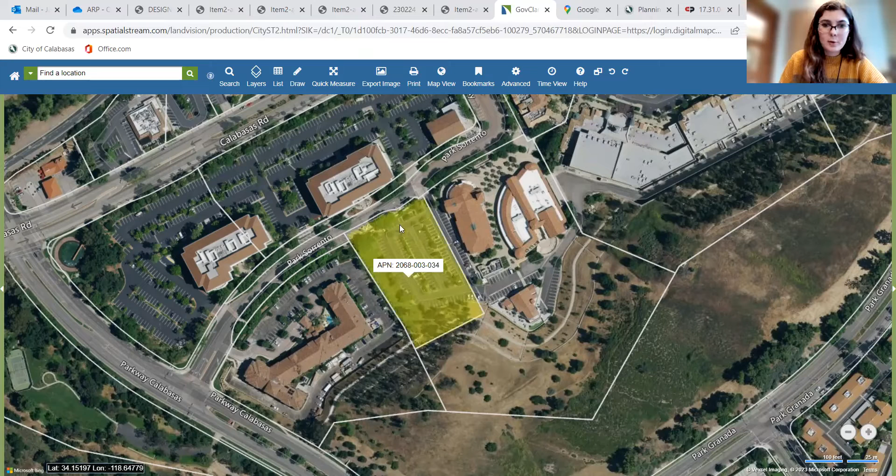So I'll just talk a little bit about the project location first, and then I'm going to flow through the plans really quick, and then I'll turn it over to the applicant's architect to talk a little bit about their design, if that's okay. So this is the proposed project location.

As you can see, this is located off of Park Sorrento. As we've heard already, it's directly next to the Civic Center complex, across the street from the office buildings located on Park Sorrento, and surrounded by the Hilton Garden Inn on the other side. As mentioned, it is in the commercial mixed use zoning district and the affordable housing overlay zone.

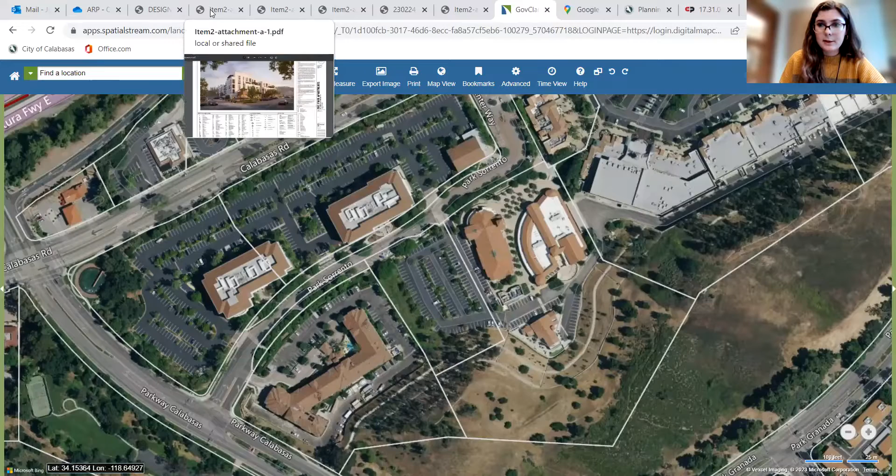Then I'm just going to pull up the plans. Again, I'll keep it brief. This is a rendering of the project. You can see the applicant is proposing to have ground floor commercial, along with parking on the ground floor, and then one level of underground parking below that. Then we have 4 levels of residential units located above that.

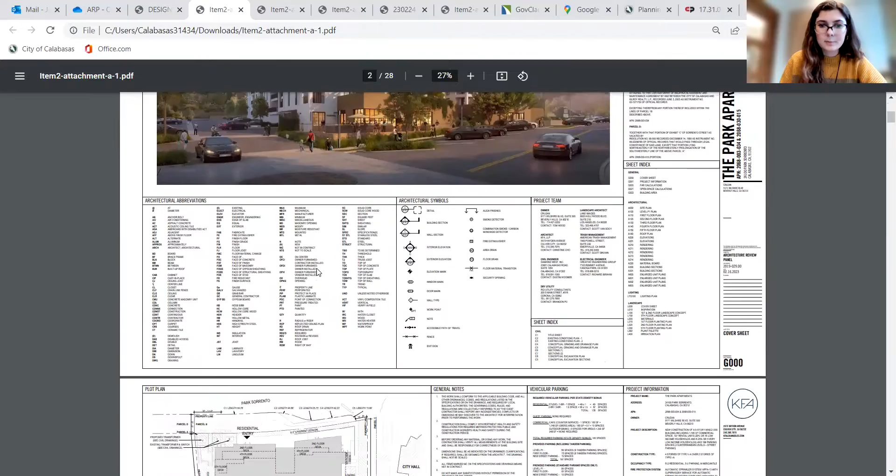Just briefly going to go through. This is our site plan. You can see City Hall to the east in this image, Hilton Garden Inn Hotel to the west. And then we have 4 stories of residential over 2 levels of subterranean parking with this central courtyard.

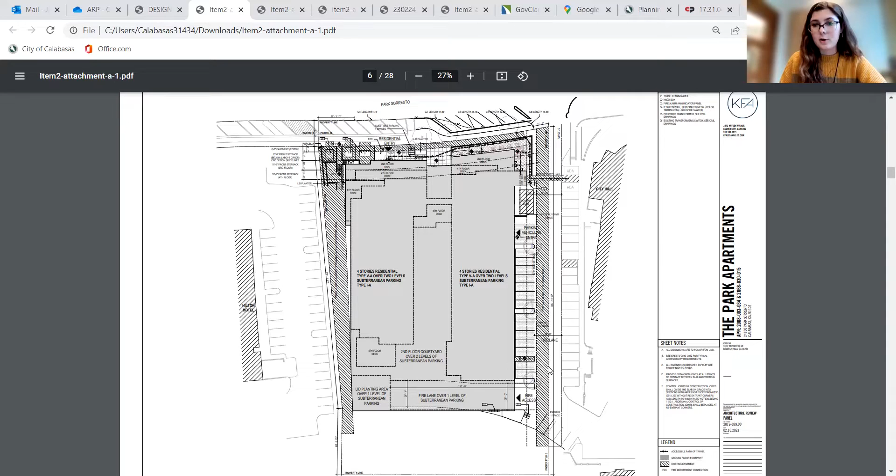As Michael had already touched upon, the review today is limited to architecture and design, so I'm not going to go through the parking related issues since those are zoning issues and not architecture and design related issues.

Okay, I'm just going to skip right through to the elevation since I think the architect will have some things to say about the remainder of the sheets.

Here we have the elevations for the proposed project. This is the project as viewed from the street along Park Sorrento. As you can see, let me try to zoom in a little bit more. This is their first level, in which the commercial area will be located. We have a counter service restaurant right here, and then the 4 levels of residential units located above that.

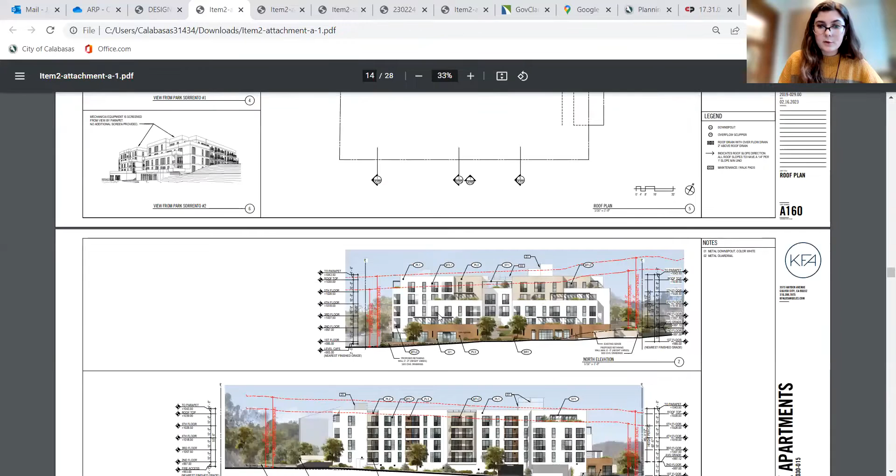This is as viewed from Park Sorrento. Then we have the east elevation as viewed from City Hall. You can see the entrance to the parking garage right there, along with this commercial component that does jut out a little bit farther.

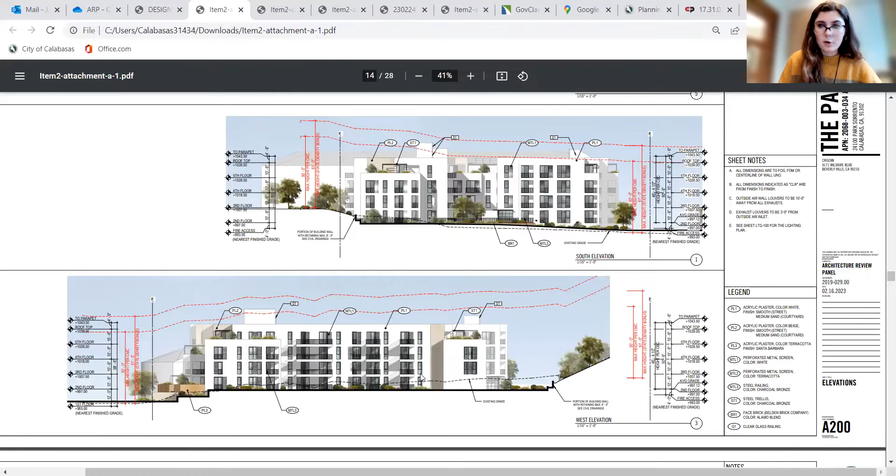The south elevation. And then we have the west elevation as viewed from the other side of the building, from the Hilton Garden Inn Hotel. And then these are interior elevations, so the courtyard from the inside.

And this is their rendering view from Park Sorrento. I believe they also have, you can pull it up, 1, 5, and 10-year vegetated renderings. So let me just show, this is their 10-year vegetated rendering. Again, as viewed from Park Sorrento, you can see those different levels that I mentioned earlier. And City Hall is just out of the image, in the area where my cursor would be right here.

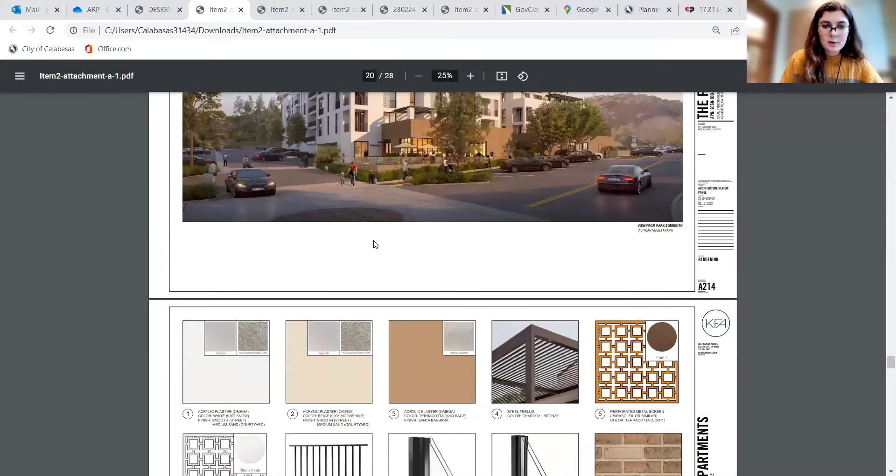We have their colors and materials board. Here you can see the multiple different colors of plaster that they'll have for the exterior. That terracotta color, the darkest color, will be the first floor. The smooth white plaster will be the majority of the building. And this color in the middle, this beige color, will be this top level right here. It's a little bit easier to see in the elevations than in the rendering, so let me just scroll back up to that really quick. Here you can see the mix of colors best in the elevations.

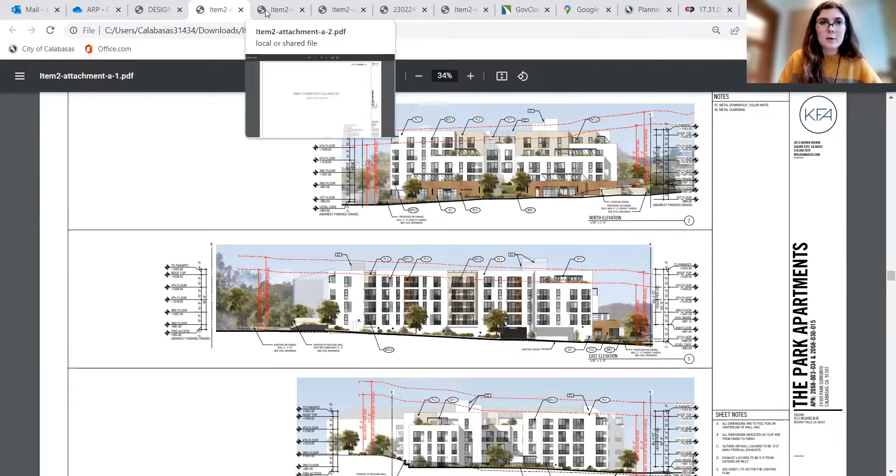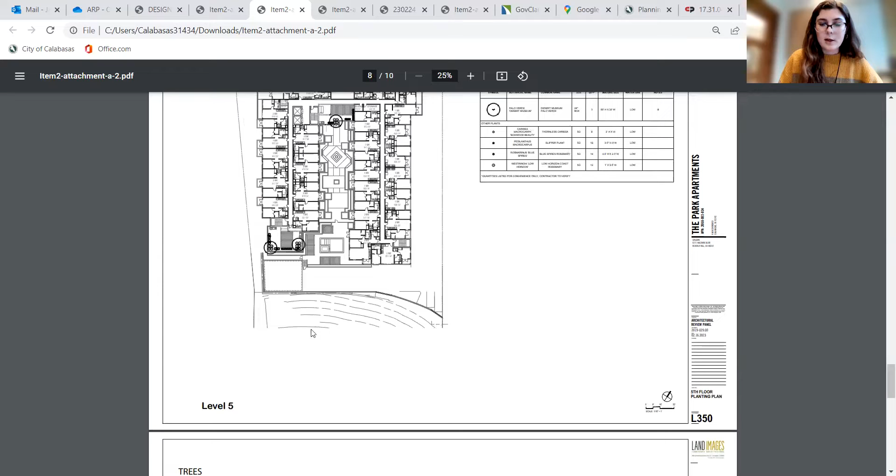Okay, we also do have their landscape plan, so I'll just toggle over and scroll through that. I won't go through all of the very specific Latin names of the plants they're proposing, but briefly, here is their planting palette. You can see they have native shrub planting at the hillside, shrubs and ground cover, trees, and some of these will be planted along the hillside to the south of the building. They also have various patios and courtyard areas that will be common areas within the building, in which trees and shrubs will be planted as well. So I'm going to go ahead and stop sharing my screen.

Apologies if you can hear that rain in the background. It's coming down pretty hard out there right now. So I'm going to go ahead and stop sharing my screen.

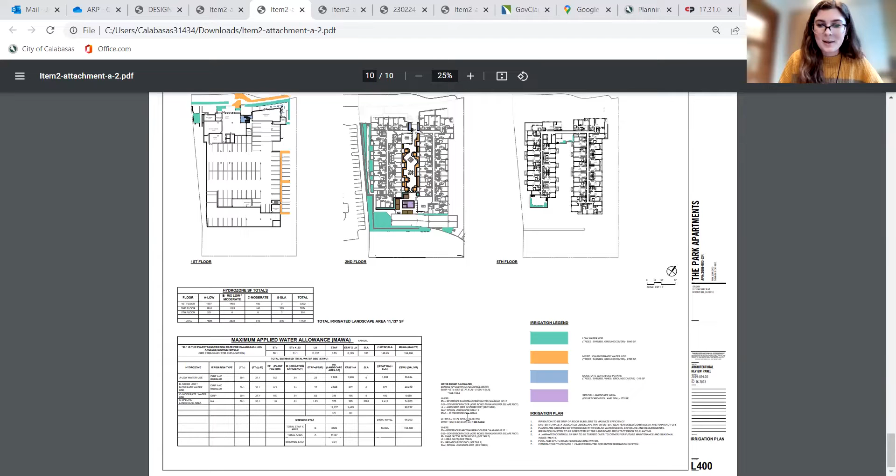Well, if you want, we can either have the panel members speak first, or we do have the applicant here, and I have a couple slides that they'd like to share. So we can have them speak first and share some words about their design. Yes, let's let that happen. And if they could just keep it to their briefest, I mean they could talk for a long time, I know that, but please have them start.

Okay, I believe the person on the architect side who's going to speak is Jonathan. I only see that we have one Jonathan here. Would you be able to raise your hand on the architect side if you're the one who's going to be delivering? Okay, we have Jonathan's hand raised. Let me go ahead and allow him to speak, and I will share my screen.

Good afternoon, everybody. Can you hear me fine? Yes, we can hear you. Okay, I think my colleague, yes, Matej, is going to put his screen on.

We'll speak very briefly because Jacqueline did a good job of describing it. Here's the context, and obviously there are hills around the site. It's kind of an interesting height question because the hotel and the office building are actually higher than the proposed apartment building. Matej, if you could go to the next slide, please.

Sorry, I have control over the screen. Oh, you do? Okay. Yeah, just let me know when you want me to go to the next.

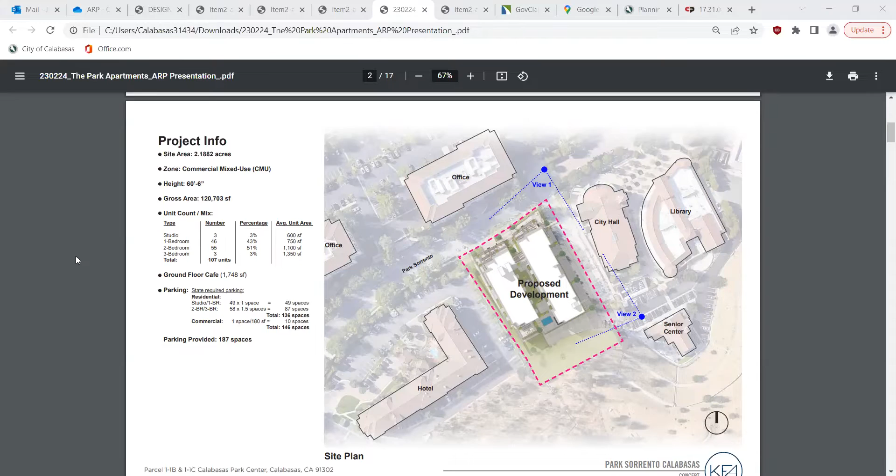Yeah, thank you, Jacqueline. So we just want to show where the two views are that we'll show in a minute on the site plan. It gives you a breakdown of the 107 units, of which, by the way, 21 are affordable — 16 low income and 5 very low income affordable units. That's a significant amount of affordable units for a project this size. You see the context, and we're trying to keep the building — we've divided it in two — to keep the scale similar to the surrounding buildings.

But there are 2 parking pedestrian entries and therefore 2 parking pedestrian exits to go across the road to the sidewalk against City Hall, just like you would walk if you're walking from the current parking lot to the senior center or the library. And they are fully handicap accessible. We're actually required by code to make that so. And the parking lot itself is fully handicap accessible and has the requisite number of handicap parking spaces.

But you'll see through on this overhead how much green space there is on the piece of land that our client owns and where the parking vehicular entry is. We do a lot of apartment buildings, and this size entry and its location is perfectly normal for 150 parking spaces. There will be very few queues or congestion at that entrance. There are also parking spaces, 16 of them on the exit, on the outside of the building for convenience.

Next slide, please, Jacqueline.

So we thought we'd get right to the architecture because that's what this hearing is really all about. And obviously we understand that Calabasas is based in a Spanish style architecture. When I've driven all around the city and walked it, there are a lot of different takes on Spanish style architecture, even within this vicinity with the hotel and the office building across the road. And we wanted to do something that wasn't trying to mimic City Hall or upstage it in any way. So it's kind of a quiet building.

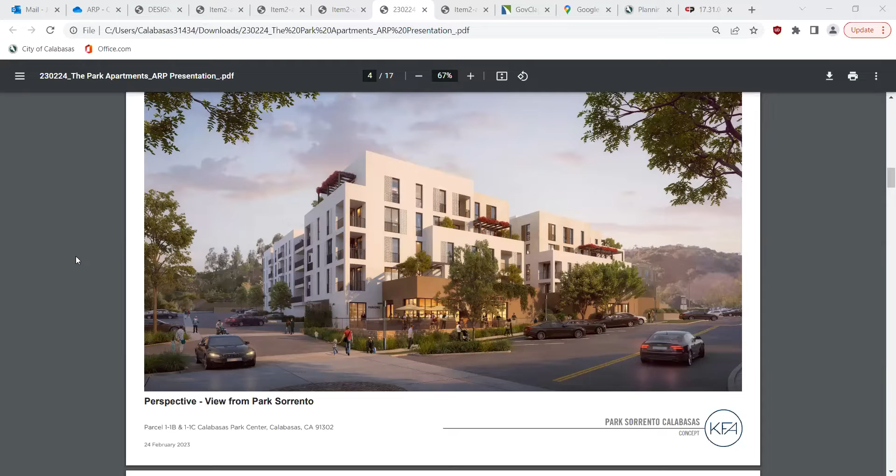We paid a lot of attention, and Scott, the landscape architect, is on the line, and we'll walk you through very briefly the landscape in a minute, but this pedestrian experience is obviously important. You can see from the massing of the building, the breakdown and the colors, we have these screens in the windows which change as they go up, and then the beige is in the most setback portions. I'll show you a section in a minute.

Next slide, please. This is looking from the senior center down, and you see the new crosswalks and the well-lit parking entrance and exit so that somebody can park close to the senior center on that ground floor parking, and exit and come across the road safely on a marked crosswalk. Also, the building, as you said Jacqueline, shows more in the elevation, but it has 2 different colors on the recesses, and then a couple of trellises on the top, and again landscaping on the building.

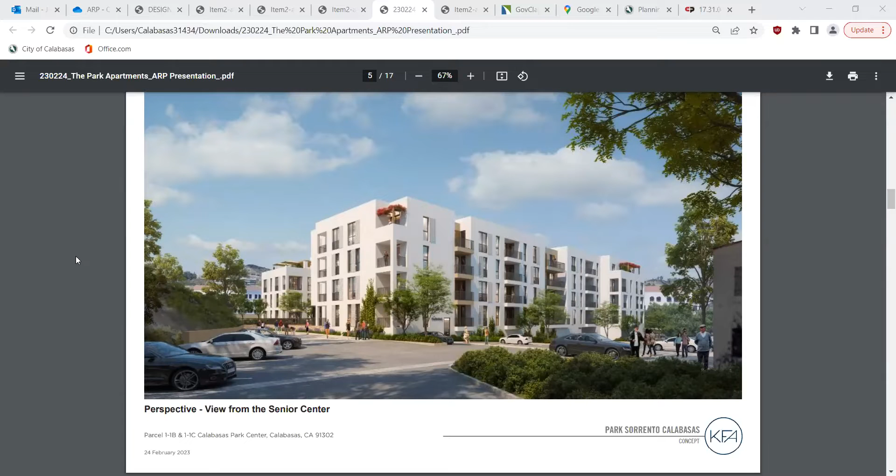And if you look over to the left, we've taken the top floor off of the west wing so that we can get more light down into the pool and into the courtyard and provide some variation on that rather nice hillside that we imagine is a nice outlook where people go walking on it, even though it's very steep. Next slide, please.

So these were the sections, and if you look at the right-hand end, you'll see how they're slightly different. One is cut through the west side of the front, on the right there against Park Sorrento. One is cut in the middle, and you'll see in the middle there's a grand stair that goes up, and we're trying to get connectivity to the street and make this feel like it's an open project.

And then there's a really nice paseo back into the building for the residents to use, so you don't have to use the elevator. You can come off the courtyard and come down onto the street. And then you'll see the step backs going back, significant step backs at most levels and different volumes to try and break the building up to make it more contextual on the street. Next slide.

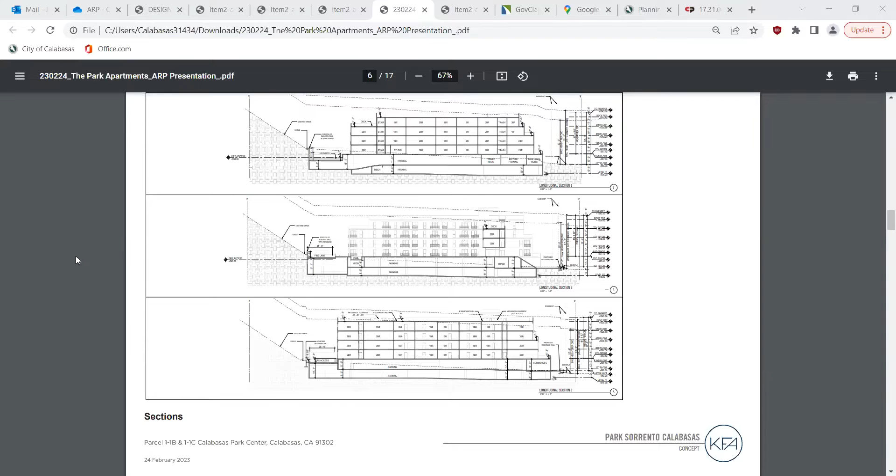So you've already shown the elevations, but I think the significance is the change in color, the amount of trellis work to try and break up and create really nice shadows and a place for bougainvillea to grow, the landscape in on all the levels.

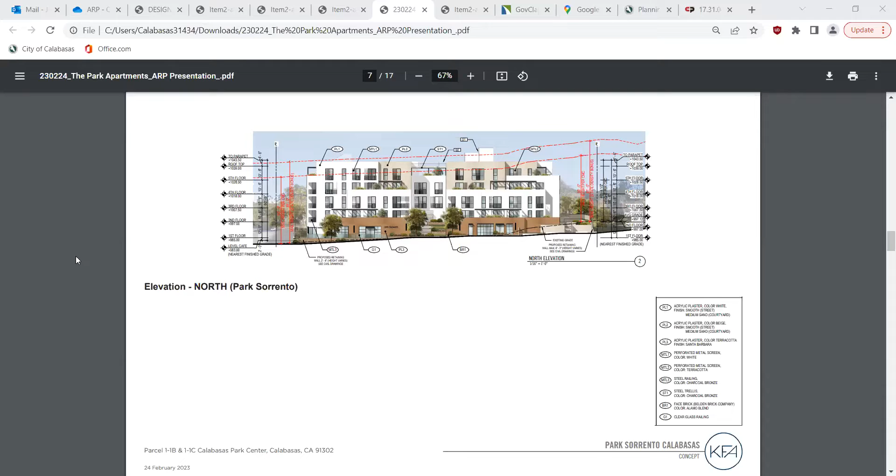We're compliant with the height as determined by the state density bonus code, which is the law that prevails for the height, so we're within the height restrictions imposed by that code. The entrance nearest City Hall is the highest part of the building, and the 60 foot 6 inches that was mentioned is correct, but that's at the very tallest part. At the rear, on one side, it goes right down to about 35 feet, so it has a changing relationship to the existing grade.

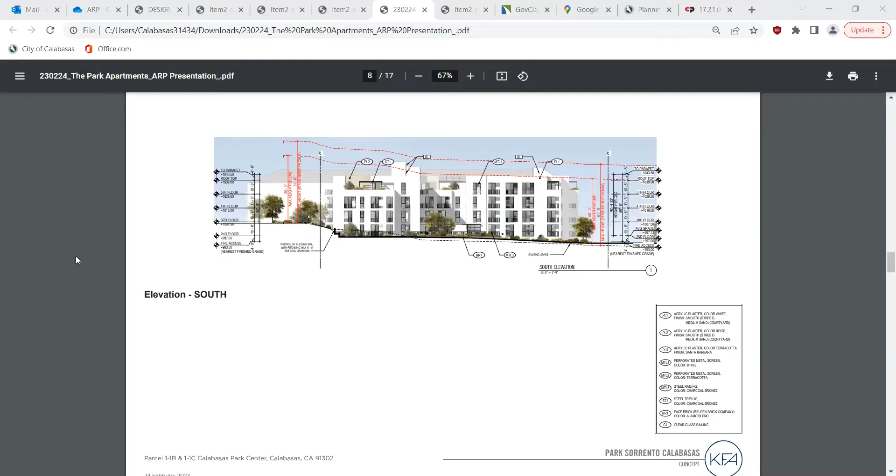One of the things we won't get into now, because I know you want to keep it short, but we've thought long and hard about the lighting. We have a lighting designer on board, making sure there's adequate light on the sidewalks, the parking spaces, and inside the building. That's been a big effort with the photometrics of the lighting to make sure there's good coverage all around the site.

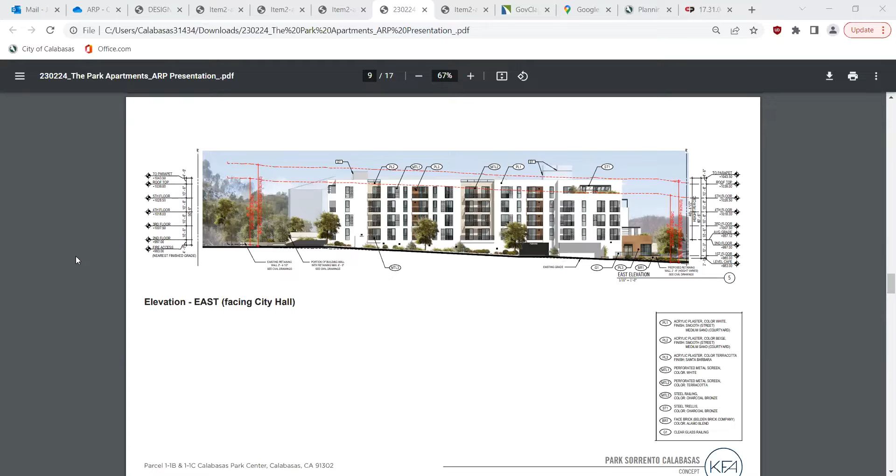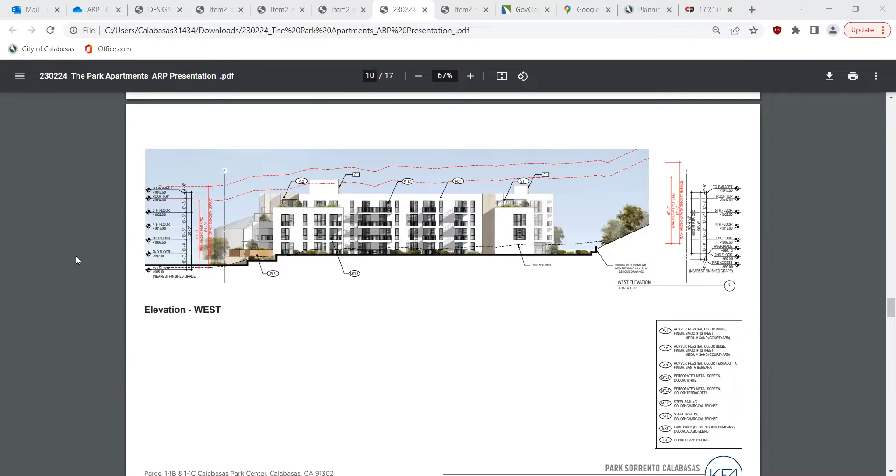So the materials you ran through quickly. I think it's nice to point out these screens that have roots in Spanish style architecture and provide some shading and some privacy for the windows, but also provide decoration and a recognition of the Spanish style roots of the project.

The metal trellis work, which will accommodate some really nice greenery, the different colors we're using, the brick, and the profile of the windows. One thing to note, the client has agreed to use all aluminum windows. I know the architects on the panel know that these days most multifamily goes to vinyl windows, and that's fine, but the aluminum ones really do look better, the color stays longer, and these are high quality windows. In fact, it's a high quality project throughout.

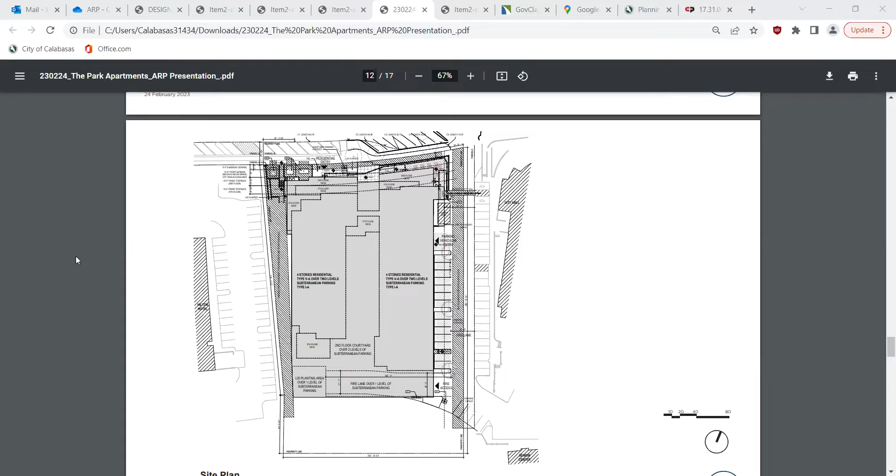So the floor plans, I think the only interesting thing here is the front on the left-hand side, a lot of working with the grade to make the cafe space accessible with a nice patio outside, the lobby comes in. You see the bike parking there. I think one of the people mentioned bike parking - there is code required bike parking space on grade.

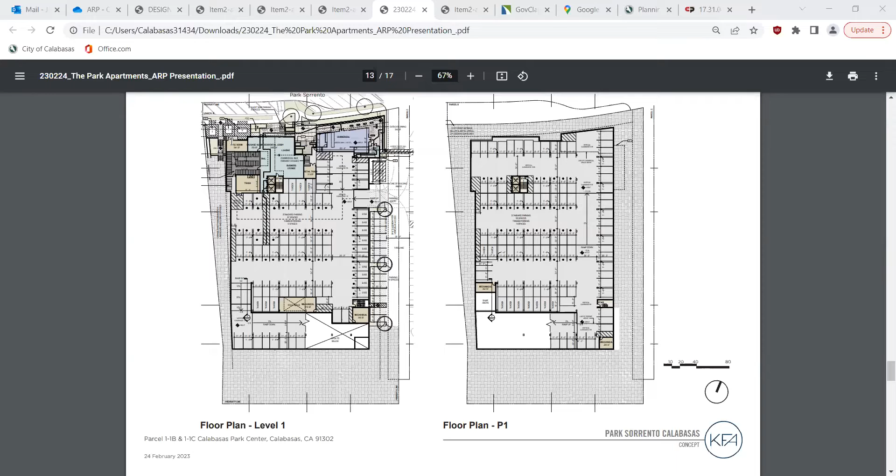Typical floor plans, the courtyard plan that shows the step backs and then the different decks up on the top floor on the left-hand side, and how the building steps back in the bottom left corner, the southwest corner, to allow sunlight in.

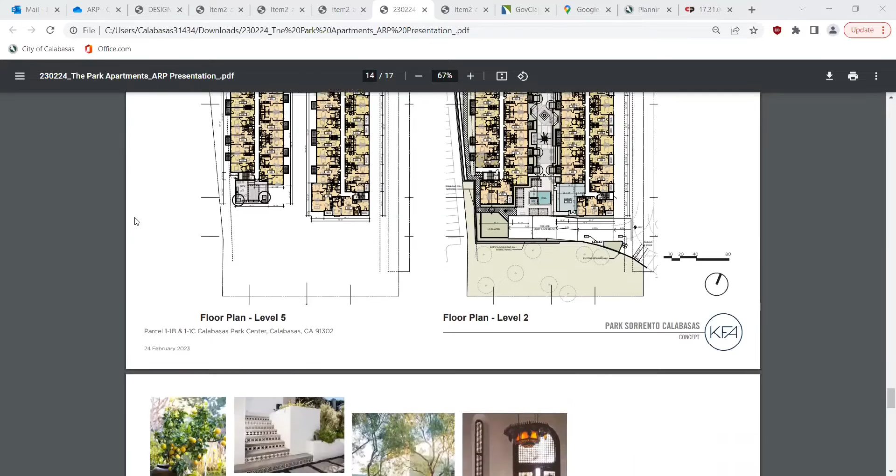This is the start of the landscape presentation, and if Scott could raise his hand, there are only 3 slides. He'll just very high level walk you through the concept if you'd like him to. Okay, I'm going to allow Scott to speak.

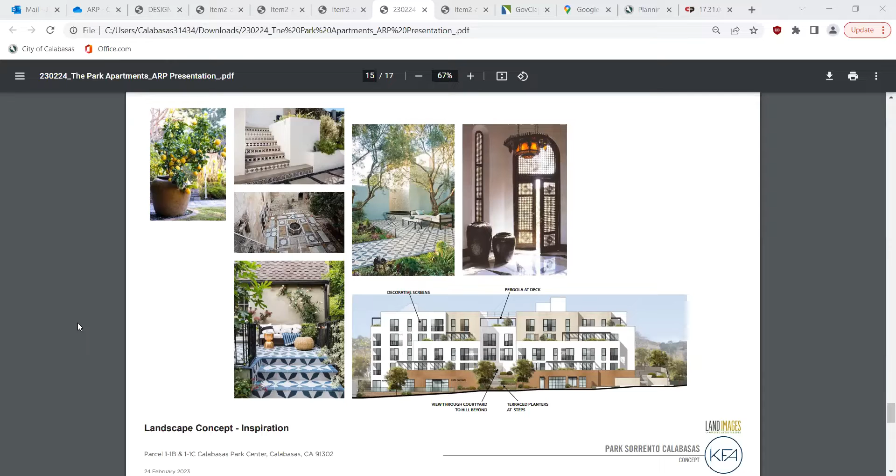The materials we're showing here are just a general palette. The idea is to follow the Spanish style architecture and bring in a rich palette of materials of varying types to bring warmth and richness to the project. Jacqueline, if you could go to the next slide.

We wanted to integrate the experience of having the hills of Calabasas be part of the project.

For the trees, if you want to go to the next slide, the plant materials aren't shown here, but the plants in general are a Mediterranean palette, greens, foliage colors and textures, a mix of different ones, so we wanted a soft, leafy green and bluish feeling palette. We're adhering to the water efficient landscape ordinance, so it is a drought tolerant palette, but should be appropriate for the style of the building.

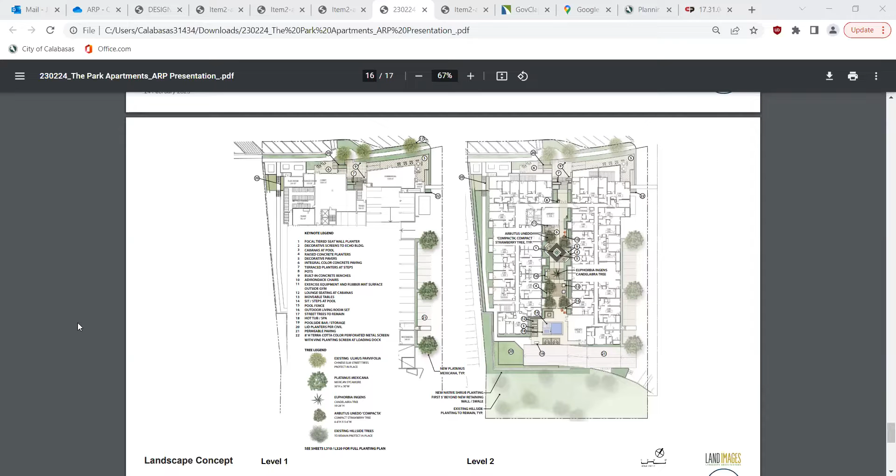Along the hillside where we have construction renovation, we will replant with native plantings, but for the most part we want to keep the hillside in a natural state. That's about all I have, so I can certainly answer questions.

Thank you, Scott. We might have questions as we go along, or the panelists might. Great, I'll be here. And thank you, Jonathan, for the high-level review of the project.

I suppose I'd like to start in the most general sense and talk about the project at a couple different scales. Jacqueline, can you turn back to that Google image?

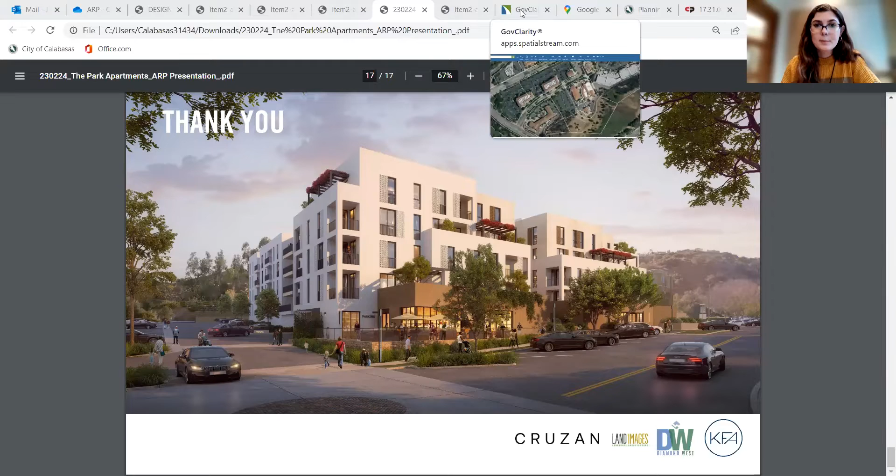This is the first significant infill project that I've seen in many years in Calabasas. So in that sense, it has a known context that it's fitting into in terms of what it's next to, the topography, and the architectural language of the city. It has a lot of possibilities to both be part of making the city and also be an internally workable building.

So if we're talking about making the city, being part of the city, I think there's a big idea about what the face of the building looks like on these two sides, because that's the biggest context you might see as a resident of the city. There's something about being contextual, I think, at least on two sides.

You had a very good presentation, very succinct and professional. But I think what's missing in your planning documents, and what would be helpful to the public, is if you began taking large cross-sections through the whole site, so we can see how tall buildings are related to what you're proposing.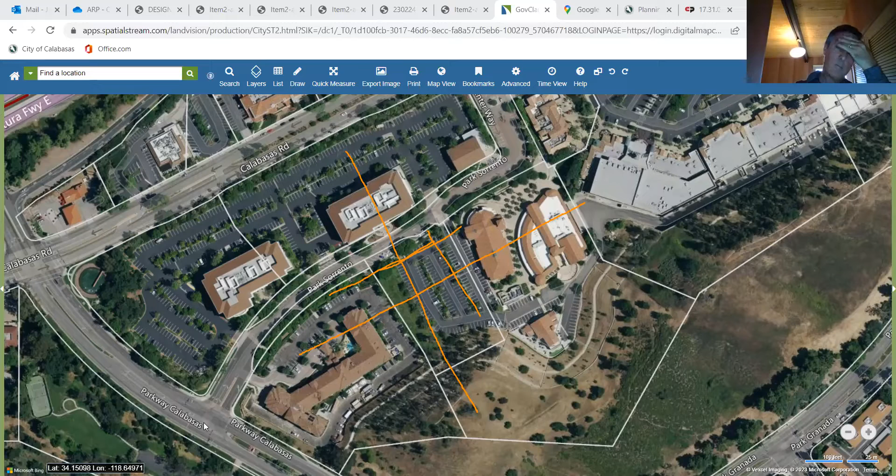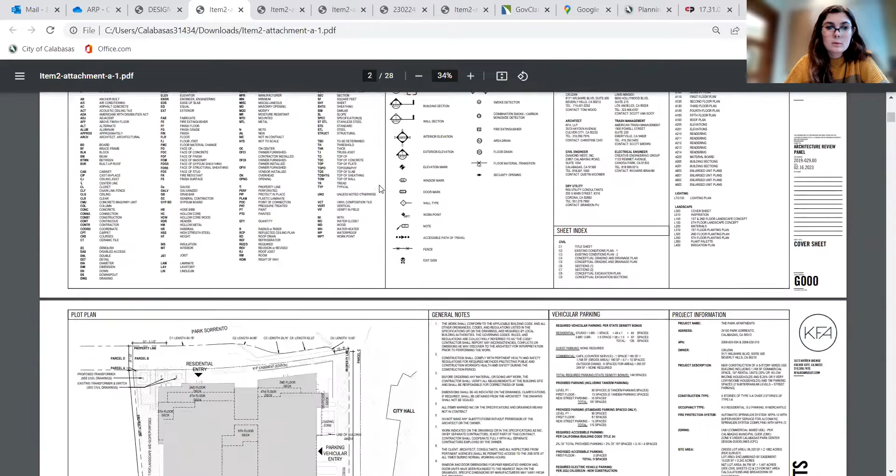And I'm sorry that I have to annotate the screen, but it's kind of the only way I can talk, is just draw, because also as an architect.

So back to the city making, the language of the building, maybe along these two sides, is really important, especially at the first and second level. What does it look like? What does it feel like to be walking by this building in relation to the other things that are around you? So in that sense, the massing, the articulation, the language, if you will, might be something that you would consider a little bit differently.

The other thing is the proportion of this courtyard. I see that you've pulled the building in as far as you can. I know that there's a zero lot line, but I wonder whether increasing this courtyard depth would be to your benefit. The units at the very lower level right around here, it's going to be pretty dark in that courtyard for long portions of the year. It would be nice that there's an equitable amount of daylight, if possible, for all the residents based on what level they're on. So I'm not sure if we could open up this courtyard a little bit.

Thinking about courtyards as city amenities, the old European model of the plaza, how do we make this a plaza, or how do we make this a plaza as a public good? Because I think there's two things: you have to be a good building for yourself, your developer, the economics of it all, but you also have to contribute something to the city. I think the contribution right now is maybe missing, either in its intentional depiction or in its massing and development of form.

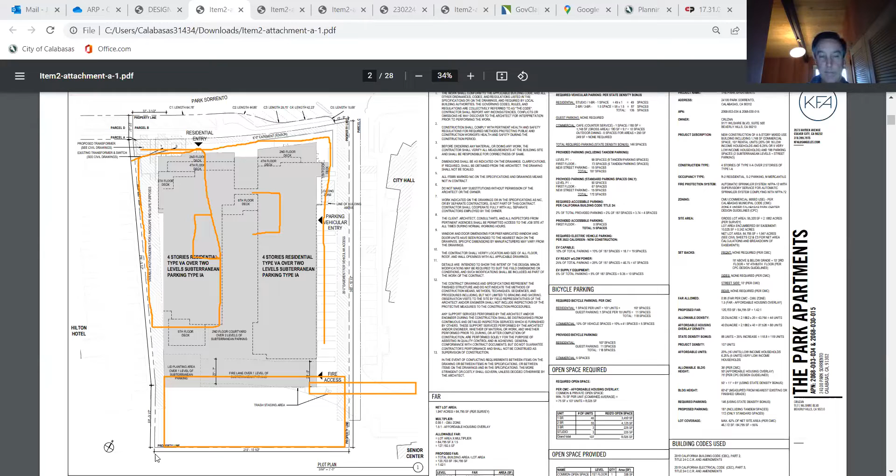I know that back in the back line would be very tall, but if a 2-story, say, parking structure was built here that just had public access - again, it's an expensive proposition, but that's the kind of city making that I think is appropriate for a building of this scale to be approved in this venue. You're asking for a lot, and that's great, but what can you give back? I wonder whether or not everything you've heard about parking and everything else, if there's an opportunity to do a couple levels of additional parking.

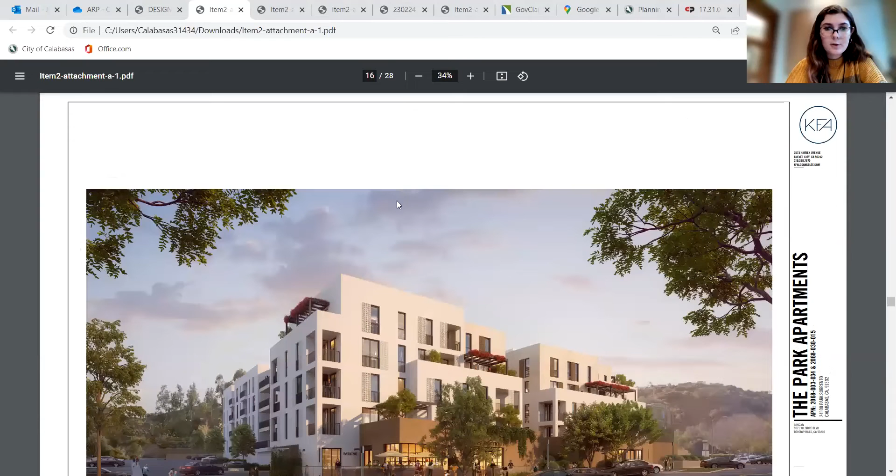And if you go to the section, Jacqueline, that goes through there, I think you can pull it off fairly easily. You go down to the sections. And then go back to that view after we talk about this. So yeah, right there. Okay, so the section on the very top, two things I'm not super happy about.

One is this condition. This is not city making. That set of steps, that 12-foot vertical rise of unbroken risers, to me, that just sounds like a toddler spinning all the way down - I don't like that. I'd like that to be broken up and a little more grand, a little more of an idea about what can you provide to the city face.

But my idea about the parking structure, could that slip in right here? Could you put a number of cars in there? And of course, there's a retaining wall here. And then is this an amenity? Is this another level of parking? Maybe there's 3 levels, I don't know, you'd have to think about that. Does it have to sit back? Maybe it's not as far out, so you can stabilize the hillside. But something like that, I think, would be a grand gesture to the city making, which was my first idea.

And then back, Jacqueline, if you could - and I won't get down into the weeds, I'd like the other panelists to talk to - but could you go to that one rendering on the front?

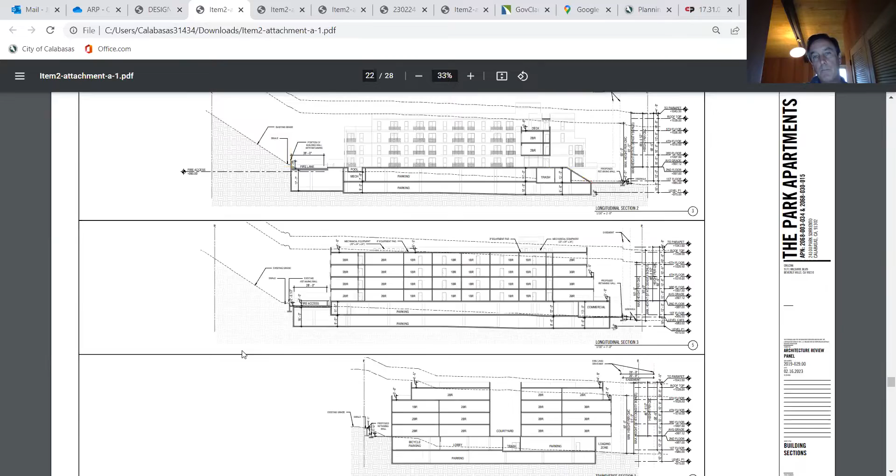Yes. This one, right? Yeah, any of those.

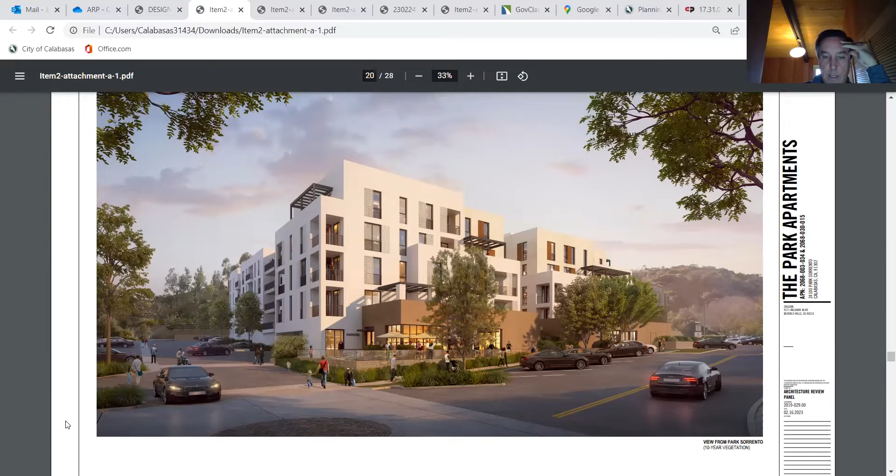I appreciate the tonality of the color change and the textural ideas and the ideas of shade and shadow. I even kind of like your mashrabiyah a little bit, but to me, this is not reading Spanish Mediterranean. I don't see that.

To me, the building is a little too stark. It's a little too modern right now. And I think you could soften it up even further.

But the first idea I had about city making is I just don't think this facade is working, because that is the sort of public view. This is how European cities work, right? It's always the sort of what's happening down here.

I think those are the opportunities to perhaps integrate some form and some building making that's a little more in keeping with the language of a Spanish style. Maybe there's arches, maybe there's tile. And then perhaps if your more modern building sets back from this base and is of a different language, but cohesive with your base, then perhaps that's a way to do both.

So to me, I like the proposal, but I think it could go further in offering something back to the city that is in the context of city making - plazas, spaces, parking, ground floor articulation, that's a little different. So I'm going to let my other panelists talk, and perhaps then after we all speak, you could respond to these comments. But that's kind of how I'd like to lift off.

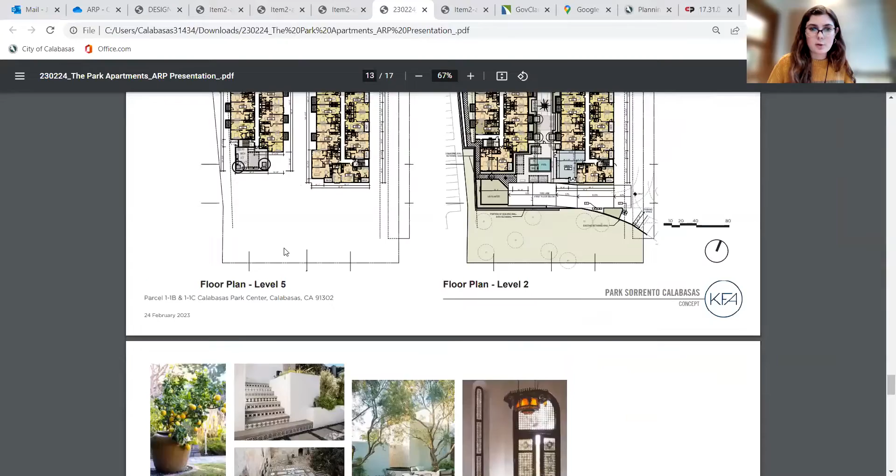But as far as that goes, maybe the site plan they had in their presentation is better to show the greenery between the buildings.

And to clarify, they are stepping back the building about 14 feet from their property line, from the sidewalk. I think the view in that rendering is probably from about right here on Park Sorrento. At the front, they have that outdoor terrace for the restaurant. So what you're seeing is this level first with greenery, then the terrace, then the restaurant area, and the rest of the building steps back from there.

Okay, thank you. That's the angle that it's from right there. Thank you for the clarification.

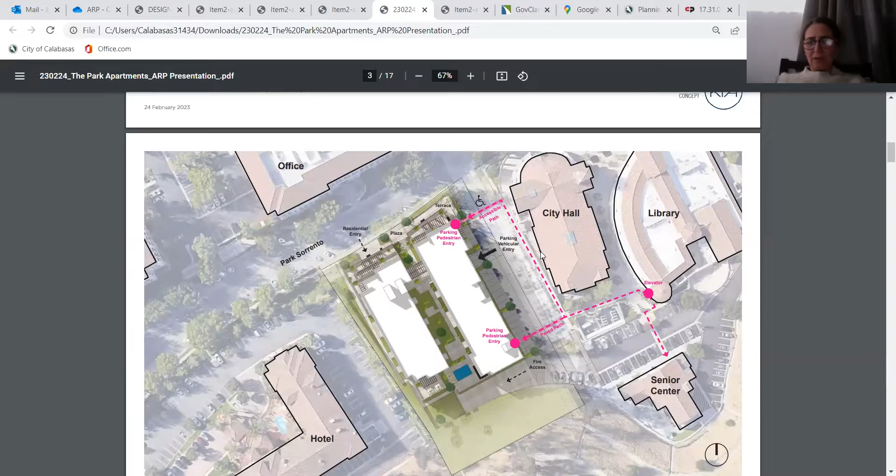I'm sorry, one more thing, just trying to be picky, seems like the shadow is wrong, because in the rendering too it seems like it's from the north or west, the sun, the shadow line. Yeah, this is a north facing facade.

Yeah, I think that's a great point, Shada. And I think that was what I was trying to talk about, that courtyard, that internal street. Even though it's landscaped beautifully, the proportion of it might be such that those lower units don't really see much light because the stories are so tall above and it's so narrow. Also internally, those hallways, those double loaded corridors, there's very little natural light that can enter, and that doesn't feel right.

That feels - I think we can let the applicant answer those. Jonathan, did you want to take that, or did you want to unmute? Yes, more members - one more thing just before we hop over to them, because the more I'm letting it soak in...

I'll mention the internal corridors, which I didn't mention but was concerned with, even on a low income project - and the whole thing was low income - we put our corridors to the outside and saved a great deal in terms of internal square footage. But also, the circulation that Will was talking about, that shared amenity, that courtyard, needs to be brought to this side. You can see it's as though it's in an industrial park - people walking in the parking lot instead of on a path or having some connection to the landscape. That's something our community has tried to move away from, this industrial park idea where you just walk through parking lots to get places.

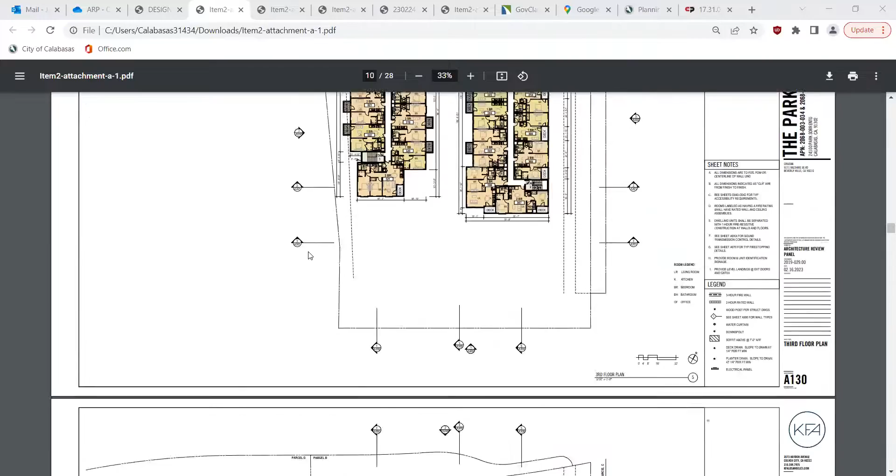Secondly, this idea of the courtyard - if you could go to the site plan - I'm sorry it looks like the rendering is done wrong, but it's actually not. It's actually a time of year when the sun comes that far round at sunset. We have programs that let you see that, and it comes past due west, as you probably know. So that is actually a realistic shot at the equinox, just before sunset.

This courtyard is 38 feet wide, which in multifamily housing is pretty reasonable, and only has a 4-story building on either side of it, 3 stories at the south end. And it faces due south. So I get some of the comments about solar access, but this courtyard will be full of light - admittedly not all day, because it's almost impossible in multifamily housing to get a courtyard all day - but it is actually fairly light. And the lower units, with only a building 40 feet away, it's almost a one-to-one plane into those units, which is actually pretty reasonable for solar access. So we have actually thought about that.

The double loaded corridor, unfortunately, is just one of those things we have to live with. We could try to do some longer, thinner units or lose some units, but I don't think my client's going to let us lose any units, because this project, because of the hillside and other requirements, is going to be a pretty tough deal to make work anyway. They are the bane of our existence to some degree, but they're not very long in the scheme of things, and we can get light on either end.

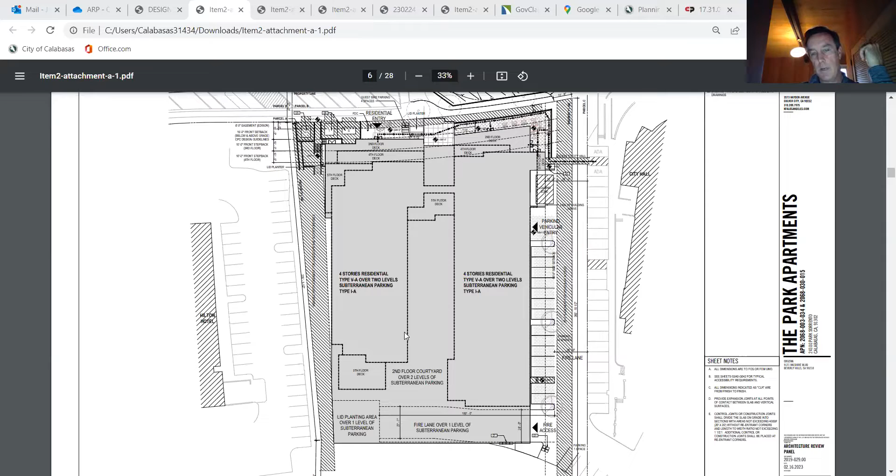Jonathan, Scott, we appreciate your patient commentary and your expert abilities, and we really truly look forward to a better building the next time we see this. We know you're up to par on this.